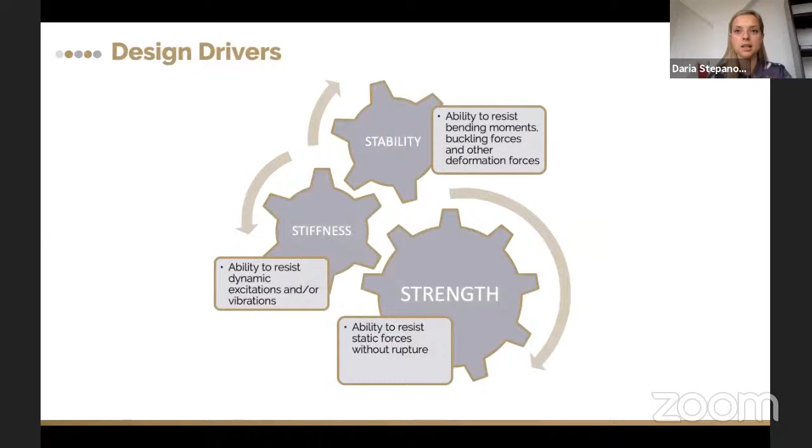The stiffness is defined as the ability to resist dynamic excitations and/or vibrations, and that's the major design driver for the launch of the satellite. And the strength, the last design driver, is defined as the ability to resist static forces without rupture. So these 3 design drivers define the materials used for structures, the structural approach, and the shape of the outer and inner parts of the satellite.

There are 3 basic big blocks in the structural hierarchy. The structure for CubeSats is divided first by the primary. This is the cube you can see below: the main rails and the brackets connecting these rails. This structure carries the major launch loads. As we remember from the CubeSat design specification, these rails are the only interface between the satellite and the deployer. So all the loads affecting the satellite from all sides influence the rails, and these rails and the connecting structure shall be as stiff as possible.

The second part of the structure is the secondary. This includes trusses, panels, booms, antennas, and components which are not really carrying the loads. That might also be some brackets inside the satellite which are stiffened enough. On the picture you can see some hinges for solar cells or antenna holders. And the last one is tertiary. These are component housings, brackets, fasteners, and other additional mechanical components.

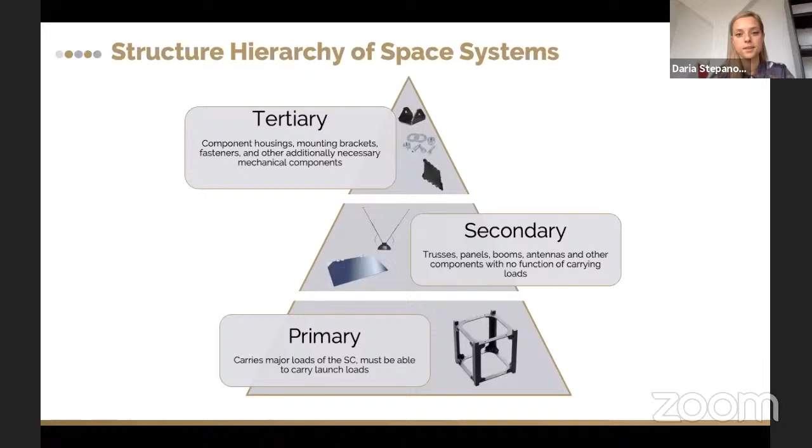Some of the components we're using do not need to be made of metal. We're also using plastic ones, but once we're talking about plastic, it's important to remember the outgassing parameters of the plastic components.

A few words about the primary structure. That's pretty much the core of the spacecraft, and it's the thing which is interfacing the deployers. It has to carry all the load which the satellite will experience during the launch, and it carries tensile and compressive stress. Here in the picture you can see some resonant modes of the CubeSat structure.

So basically during the launch, the satellite can be affected by this force and by this force, and the structure shall carry all these loads and not let the components get detached or get broken under this stress or bending moments.

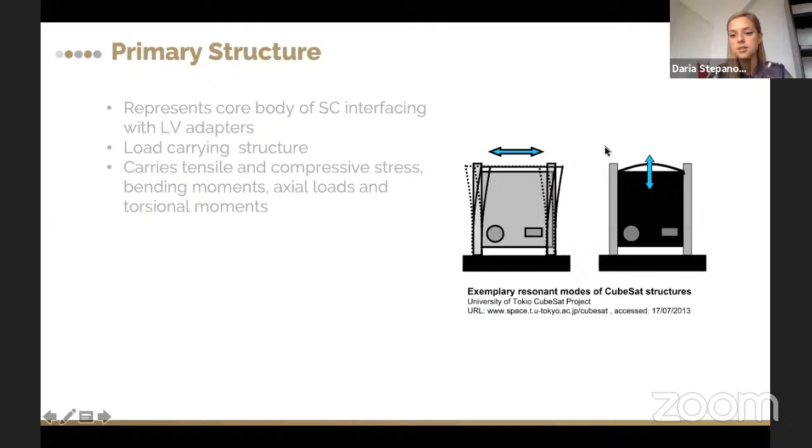There are a couple of major requirements for the primary structure. It shall provide a load path between the spacecraft and the launch vehicle. And as you can see, there are two bending forces, so the structure needs to accommodate these forces in an optimal way. It's a mechanical interface to the launch vehicle, as I've just briefly mentioned already.

It shall also provide access to components and assemblies during ground operations. For example, one big challenge CubeSat developers are facing: these panels are normally covered with solar panels, which are mostly the last component to be attached to the satellite, and it's pretty hard to connect the last connectors to this panel.

So the structure shall be designed in a way that all components can be accessed in an easy and fast way, and all the cables can also be attached in an easy, fast and optimal way. The structure carries the dead weight of the spacecraft. So besides the launch vehicle loads, it shall also carry the weight inside the satellite.

It shall secure positional stability for antennas and other instruments after launch and under changing temperature conditions. So temperature expansion shall also be taken into account while designing the structure. Antenna placement and instrument placement are particularly important because of the radiation patterns and the pointing of the instruments, which can influence the mission objectives afterwards.

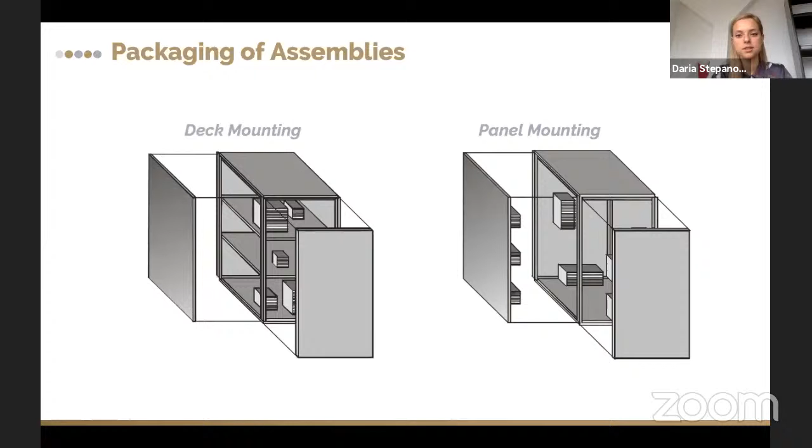In this case, internal components are placed on the sides of the satellite, and the basic structure is not carrying any components, and during the satellite assembly, all the panels are closed together with the components. Here you can see two examples of deck mounting and panel mounting.

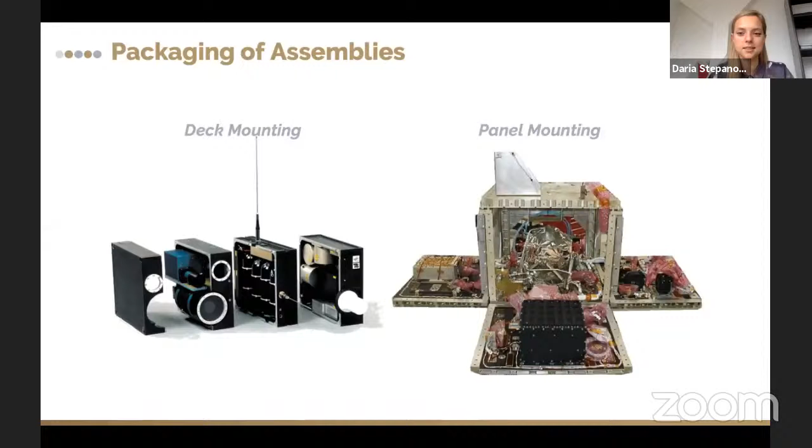Pretty much as I have said, in deck mounting the components are placed inside, and these two covers are the last pieces to get assembled. In panel mounting, a lot of components are placed outside, and we can see a little bit of a mess here with the harnessing and with isolation. But basically that's the concept and the idea.

Another two ways found a lot of applications in small satellites and CubeSats in particular. These are stack configuration and slot configuration. Stack configuration is something similar to PCs, using some standard connectors such as PC104 or some slot edge connectors.

Several PCBs are attached to the backplane PCB, and this is later assembled from the sides, stacking components on top. The big disadvantage of this approach is if, during the testing or during the assembly, one of the components gets broken, or there's an urgency to substitute a component, it's required to disassemble the whole stack and then start the assembly process from the beginning.

Slot configuration is something similar; it just differs from stack in that there can be several slots, and slots are a little bit easier to disassemble. You can see the connectors on this side, and slots are attached to these edge connectors.

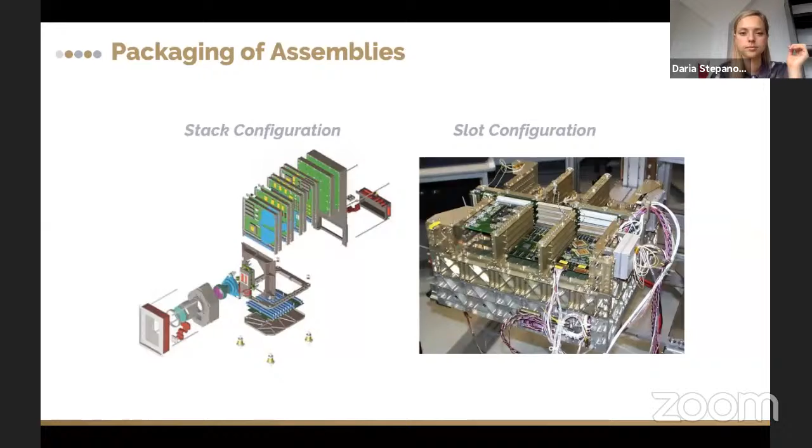So regarding CubeSats, here you can see the evaluation of each of the packaging options. Deck mounting is not really suitable for CubeSats because there's no particular deck in the CubeSat. Stack configuration is the one which is the most commonly used in the satellites, and once all of them are connected, either the ribbon cable backplane or standard connector, which is PC104 style, is used. However, integration and replacements, as I said, require a lot of additional effort, as does disintegration.

Panel mounting is possible in the small satellites. However, due to size limitations, it's pretty hard to handle. The panels have to be somehow connected, so that already makes it harder. That makes it harder to develop the harnessing inside the satellite, which brings complex wiring. The integration procedure becomes more difficult and most likely irreversible, because once the panels are mounted and everything is connected, it's quite hard to break some connections and some attachment points. That might make the procedure irreversible.

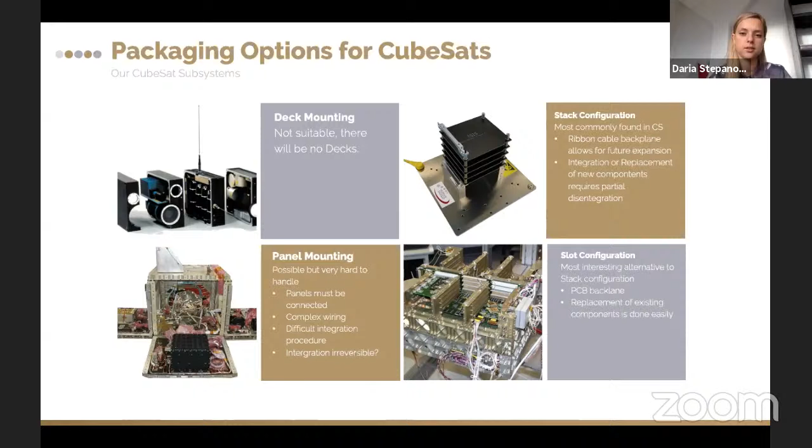Slot configuration is a really interesting alternative to stack configuration. It uses the backplane, and the replacement can be done in an easy and fast way. However, we didn't see many CubeSats with this packaging option. Mostly, I think, due to vibrations, the stack connector can get a little bit damaged. So the big question here is how to ensure a good connection between the board and the connector without advancing too much the mounting of that, and not making this a stack configuration.

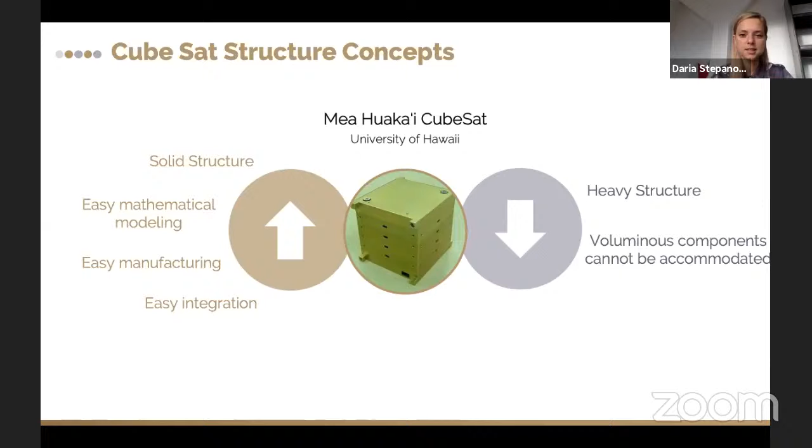We will review some of the examples for the structural concept, and the first one is the Mea Huaka'i CubeSat from the University of Hawaii. They use the solid structure. You can see there are not so many cutouts, it just looks like a big piece of metal. Some of the advantages are the easy mathematical modeling. Basically, this kind of structure most likely will carry all the necessary loads. It was pretty easy in manufacturing, and integration was easy. However, the satellite itself became quite heavy, and there is no possibility to accommodate components outside. So when designing solar panels, all the components of the solar panel shall be on the outside, like all the diodes and connectors, which is not always really easy to make.

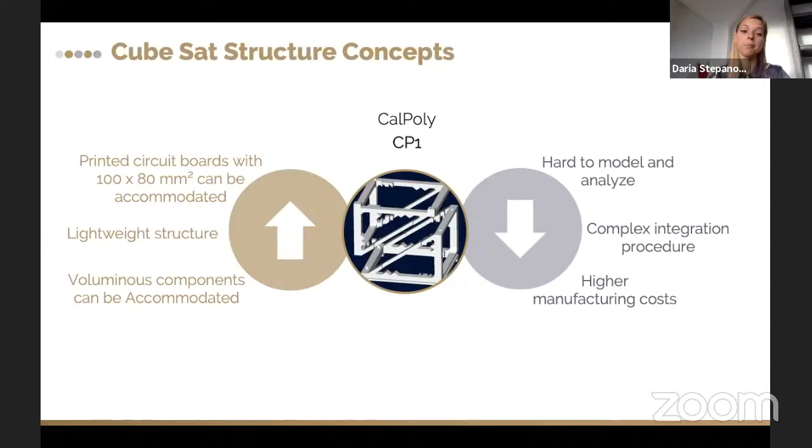The next one is the Cal Poly CP1 CubeSat architecture. It consists of two modules connected with these diagonal-shaped bodies. It's pretty lightweight. It can accommodate components on the outside and is pretty flexible with the inside accommodation. Printed circuit boards of the size from 100 by 80 millimeters square can be accommodated inside. However, this structure is pretty hard to model and to analyze in terms of stiffness and strength. The integration procedure might be pretty complex, and obviously the manufacturing cost of this shape is higher compared to the structure we've seen before.

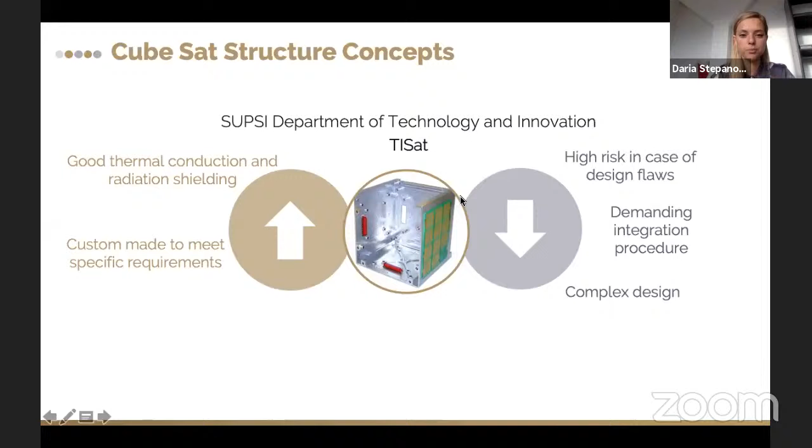In case there are any design flaws or there is another iteration of the payload and these access windows change in time, there's a high risk of the structure not being suitable anymore. So the integration procedure might be quite demanding, and the overall design might be quite complex. Yeah, this is how it looks. There are a couple of mounting points and access windows. However, as I said, all these parts might also be hard to manufacture.

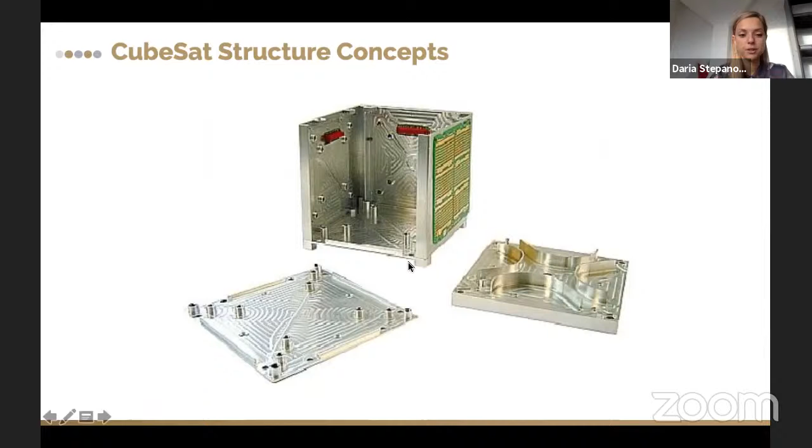Interesting concept. It was made by ISIS. This is the CubeSat structure I think most of the CubeSat companies got inspiration from. This one is really easy to buy. There is an online shop for CubeSat components, which is similar to a normal online shop. It's available in many different form factors, from 1U until 6U and already 12U.

It's quite a cost-effective solution. However, customers have to comply with the PC104 standard, so the mounting holes for the PCBs in the structure are already fixed, and in case the satellite designer wants to use other PCB sizes, there shall be another bracket or something which will attach the new design to the structure.

There are not so many options for deployables, so the structure tries to accommodate the maximum possible volume in the deployer, thus limiting the space on the outside of the satellite. And the side panel mounts are fixed, so there are also not many options for how to adjust the panel mounts.

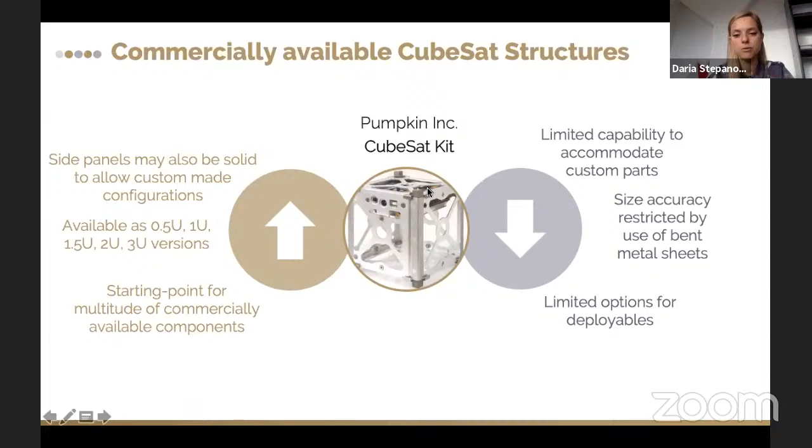Including these shapes in the structure, there is already a limited capability to accommodate custom parts. So in case there is a payload which has some specific aperture looking outside of the satellite, it shall comply with these cutouts. Size accuracy is restricted by the use of bent metal sheets. As these sides are made of sheet metal, there shall be other structural components, like these main brackets, top and bottom, which have to carry all the loads. And again, limited options for deployables.

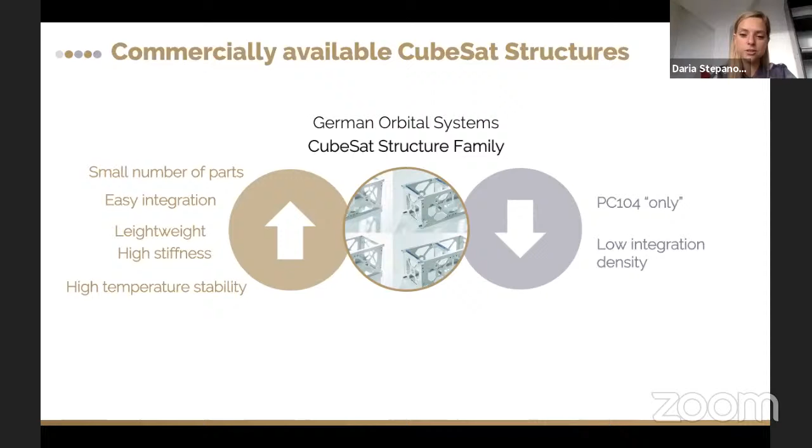As you can see, the CubeSat structure that we are providing has been inspired by this isogrid pattern. It consists of a small number of parts and is pretty easy in integration, lightweight and high stiffness. We're making it from aluminum alloy, which helps us to achieve high temperature stability. From the disadvantages point of view, it also mostly carries the PC104. There are some brackets available for other form factors of the internal components, and low integration density is also one of the disadvantages of our structure.

A quick summary on the structures. It has to be made out of aluminum for good thermal properties and good interface matching between the satellite and launch adapter. CubeSat configuration is actually determined by the primary structure. The primary structure sides, apertures, openings are on one side defined by the payloads and by the systems which are in the satellite. However, they also dictate the composition of the satellite and their placement.

Many CubeSat projects develop structures on their own. That's true because the structure is not the most complicated component of the satellite, so many manufacturers are pretty free to design it by themselves. Interestingly, approximately 20% of the total mass of the satellite is due to the structural elements. So they tend to be over-dimensioned due to limitations in manufacturing small wireframe structures.

As for composite materials, there are some structures made of composites, and I think there were several experiments launching composite structures. However, it's not as widely utilized as I think it might be in a couple of years. For CubeSat structures, launch loads like sinusoidal, random vibration, acoustic, and shocks are pretty much harmless. That's due to the design approach and material selection.

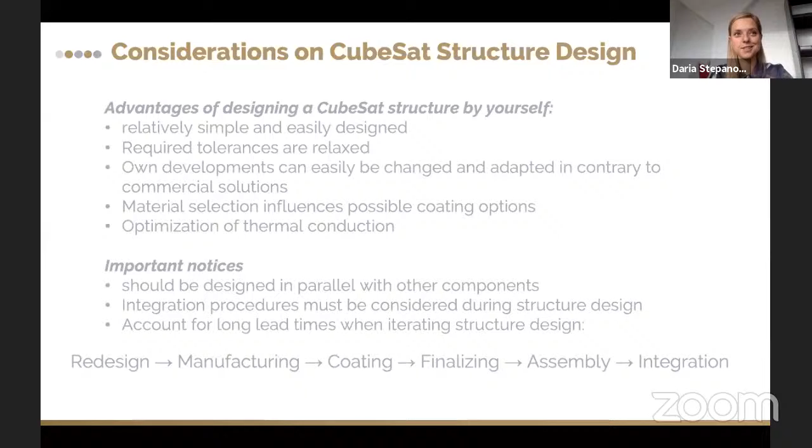All right, basically, there are these steps in structural design: design or redesign, manufacturing, coating, finalizing, assembly, and integration. This is the flow of the structural life in the CubeSat. And with this, we're going to the second topic, which are mechanisms.

Do you have any questions so far regarding the CubeSat structures? Or everything is fine? Okay, thank you. Are there any questions? Okay, if there are no questions, I'll continue with mechanisms.

There are a couple of types of mechanisms in the CubeSats, and the first one all the CubeSats shall have, based on the CubeSat design specification, are deployment switches. These are really small sub-miniature micro switches, which are attached to some spring mechanism. Basically you can see it over here. This is the structural side. This is the rail, in the cross section of the rail. This is the micro miniature switch, spring, and it can be a screw, it can be just some cylinder made of metal.

So once the satellite is in the deployer, this switch is pressed and the satellite battery is detached from the rest of the components. When the satellite is deployed on orbit, this switch gets unpressed, and the battery then is connected to the main system.

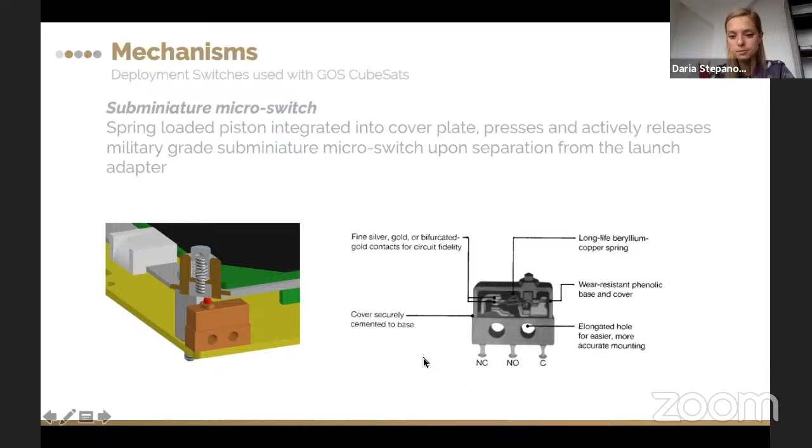So this component every CubeSat shall have and shall accommodate on the rail side, it shall be somewhere on the rail, because there shall be a connection between this mechanism and the deployer side. And here you can see the internal parts of the switches.

The next one is the solar panel hinges or solar panel deployment mechanisms. You can see several times folded solar panels. Basically, this is a pretty easy mechanism. Hinges are also supported by springs, and the panel is folded several times. And then a mechanism really similar to the antenna release mechanism, which I'm going to talk about in a few seconds, is used. Once on orbit, this mechanism is activated and the solar panel, due to the spring forces, is deployed.

Antenna release mechanisms for CubeSats, there are several types. Most often it's an electrically powered heating wire made of nichrome, and the antenna is attached to some plastic or any type of material part with a nylon string. Once on orbit, the wire is heated and the nylon filament is melted. On this picture, you can see the example of the BEESAT antenna release mechanism.

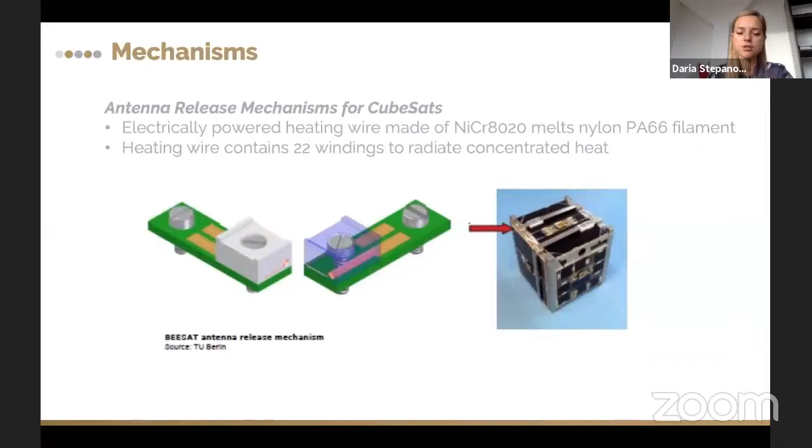Instead of the nichrome heating wire, it's also possible to use a resistor or any other component which can be warmed up pretty quickly and does not outgas so much. So that was a pretty easy, pretty fast, really easy to reinstall mechanism approach.

There are more interesting antenna mechanisms. For example, this one is accommodating up to 4 antennas of different lengths. All these antennas are stowed inside this really small compartment. But inside of this compartment, absolutely the same approach is utilized. So there's also the melting wire and the heater, which are activated at some point, and then due to the spring forces in this part, the legs of the antenna release mechanism are opened.

This mechanism is a little bit more difficult to handle and to reinstall. However, it's quite small in shape and can accommodate up to 4 antennas. All right, that was briefly about the mechanisms. And from here, we will continue with the power control and distribution system.

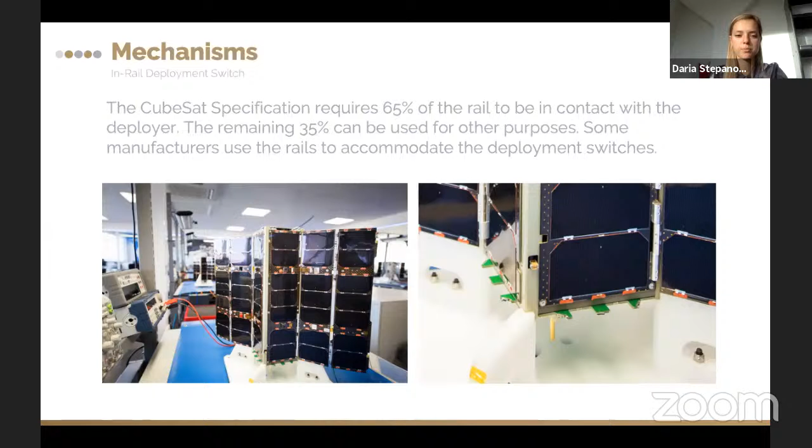Yeah, however, Azur Space is selling just the solar cell components, but the whole solar panel has a little bit more complicated design. For example, the protection from solar cell failure, the maximum power point tracking, the thermal control, and so on. So at our company, for example, we're taking the cells and we are providing the design of the solar panels of different shapes and so on. And pretty much every CubeSat company is doing that.

All right. Next, the power control and distribution system. There are four main tasks the system is doing. The first one is the conversion, storage, and distribution of electrical energy. And here we remember such components as solar panels, batteries, and control modules for distribution and processing. Acquisition of system health parameters: as soon as the power is distributed between systems, it's also required to get feedback about whether they consume enough current, or whether there is some anomaly which makes them consume more power than was specified. Operation of switches and systems monitoring are the third and the fourth one.

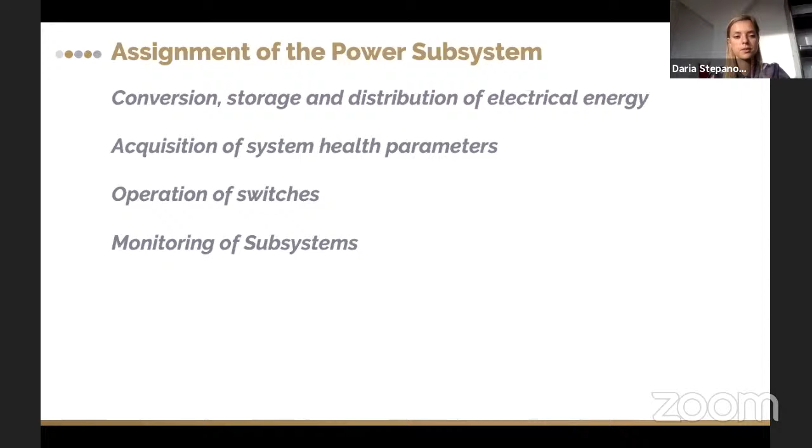So general requirements for the power control system are listed here. EPS shall provide a continuous supply of electrical power. It shall control and distribute electrical power between payloads and the main bus. It shall support requirements of peak and average power. For example, once the communication modules go into transmit state, or some system turning on draws a lot of current at that moment, the power system shall take this into account and either smoothen it or prevent the system from turning on.

It shall provide telecommand capability for systems control. Basically, that means that we shall be able to send a telecommand to turn on or to turn off the system. It shall provide telemetry capability for system status. That includes power consumption. Is the voltage level correct? Is there any fault in the system switch? Activation and deactivation of assemblies, protection of the spacecraft against failures of the power system. And here we shall also consider redundancy in some of the main components, avoidance of single point errors and redundancy strategies. Basically, that's what I just said.

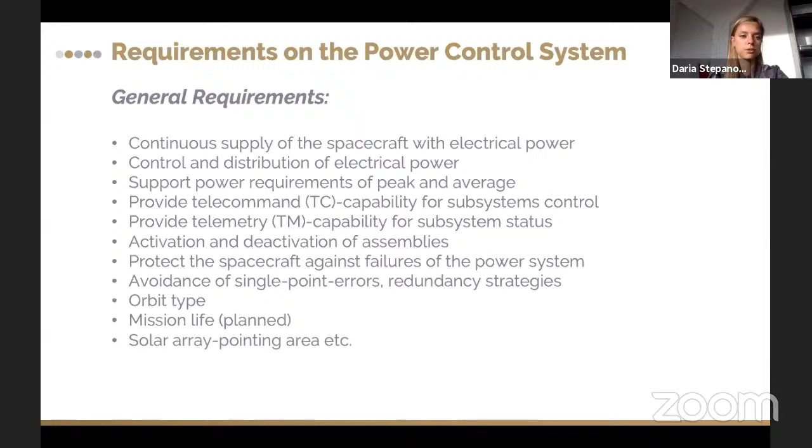The EPS shall also consider orbit type, in terms of height and inclination, which will influence the solar cycles. Mission lifetime planned, this mostly influences the battery charging and discharging cycles. Solar array pointing area, and so on. So these were the system requirements. If we're talking about mission specific requirements, there shall be the type of the power supply bus. There can be several types.

Bus voltages, these are normally 3.3 volts, 5 volts, unregulated, and 12 and going higher. Energy and power demand in different satellite operation modes. We're going to see that a little bit closer in the next slide, but it depends on the number of active components and their duty cycles. Type and amount of system health statuses, measurements, values, and this includes currents and voltages. It can also include temperatures. Yeah, these are most commonly used.

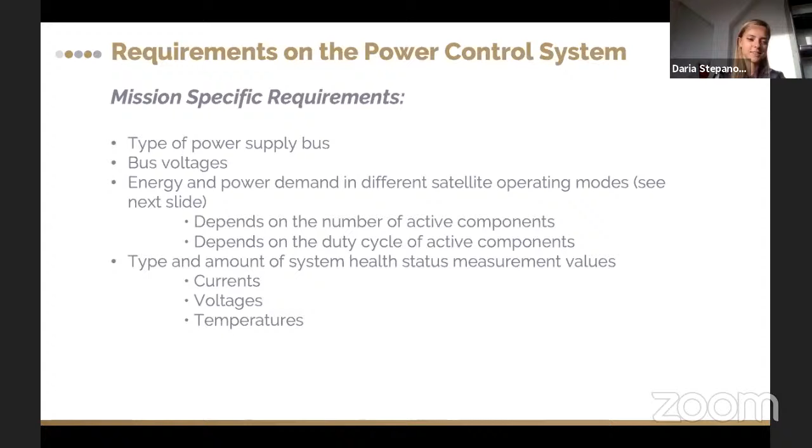And we'll not go into detail of every one of these requirements. Based on this example, the power control distribution unit from the satellite, we'll see how the design process is and how we go through all these requirements to get the proper system working in the end.

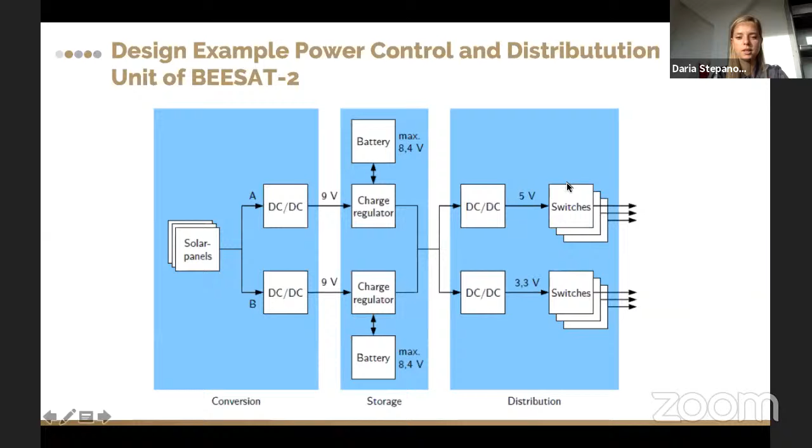Charge regulators are autonomous switching units, which are based on the voltage and current level from the solar panels and the state of charge of the battery. Most of the time the voltage level of the battery decides whether it's time to charge the battery or the battery is completely charged. Then from the charge regulator, the power line goes to 2 converters, in our case 5 volts and 3.3 volts, and each of these power buses is then supplied to the switches.

As I mentioned, here are the solar panels and solar cells. We are purchasing them from Azur Space company. The triple junction gallium arsenide solar cells with 30% efficiency. We're using in this satellite a configuration of 5 panels with 2 cells on each, and one panel was accommodating 8 cells, but that was more of an experimental thing. In this kind of small CubeSat, the available power was around 2 watts, and that was pretty much enough for all the experiments we wanted to conduct.

Here you can also see how the solar cell itself looks. That's the datasheet screenshot, which shows the parameters of the solar cell. Average open circuit voltage is 2.5 at the beginning of life, and average short circuit current is 16.9 milliamps per centimeter square. So if we calculate the area of the cell, we'll get the average short circuit current.

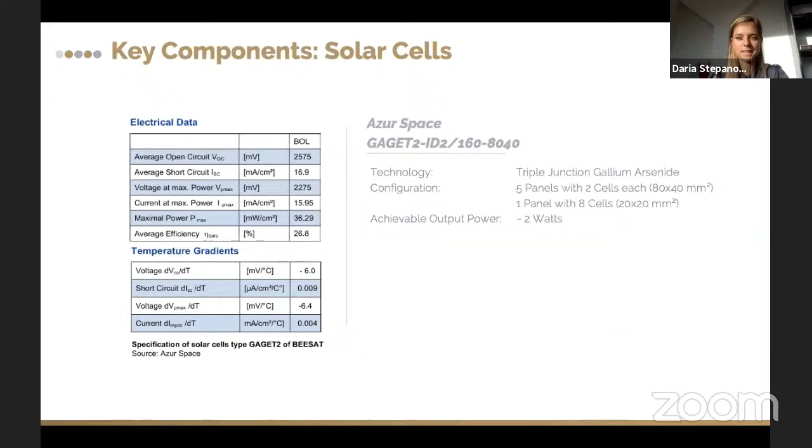There are also some temperature gradient characteristics, which are important to include in the power budget analysis, because the curve which connects voltage and current of the solar panel is influenced by the temperature. And as we see, the solar cells are black, so they might get pretty hot in the sun. This will also influence the power on the output of the solar cell.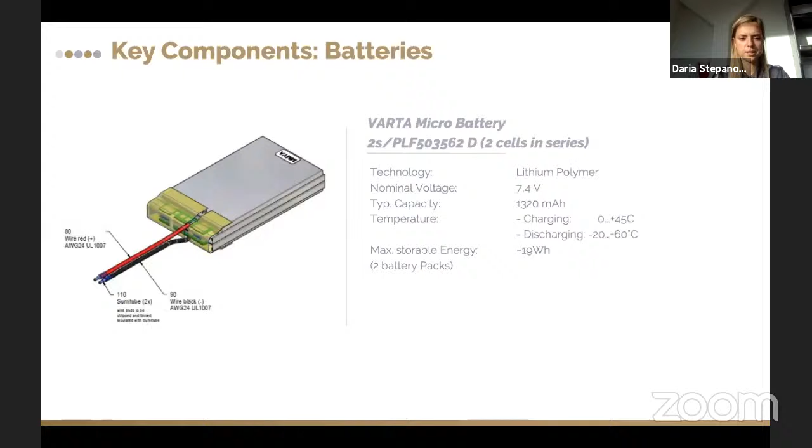The critical thing here is the battery can only be charged when the temperature of the battery is more than 0 degrees. In order to prevent battery failure from charging in the cold, we're also adding heaters and temperature monitoring in the battery pack. Maximum stored energy of the 2 battery packs used in the satellite, BSat, was 19 watt hours. Basically, 2 battery packs were used.

The power control unit is the unit responsible for processing and distribution of the power. It is based on one microcontroller, which is controlling all the switches. It gets the information about switch states and power consumption of all the modules through analog to digital converters. In that case, it was 16 channels on each converter. There is a circuit with an integrated watchdog, which helps against latch-ups during on-orbit operation.

The basic principle of this system is the following. The main switch is controlling the power coming to the microcontroller, and the watchdog has a specific period of time where it shall receive the signal from the microcontroller. If it does not, it resets the main switch enable signal, and the main switch does not feed power to the microcontroller anymore. In case of microcontroller failure to send the signal to the watchdog, obviously something has happened and the power of the microcontroller is reset.

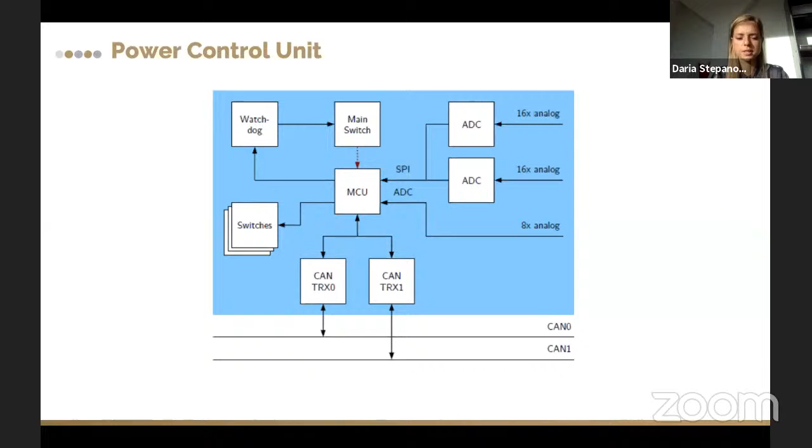In this way, it's possible to save the microcontroller in case some particle event is happening. The microcontroller is also connected to two CAN buses. There is a redundant CAN bus introduced in the satellite, and for that there are two transceivers installed. And here you can see the first prototype of this control module.

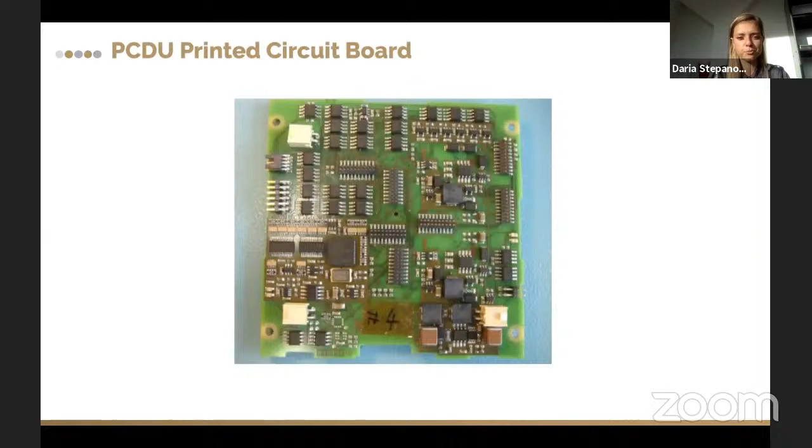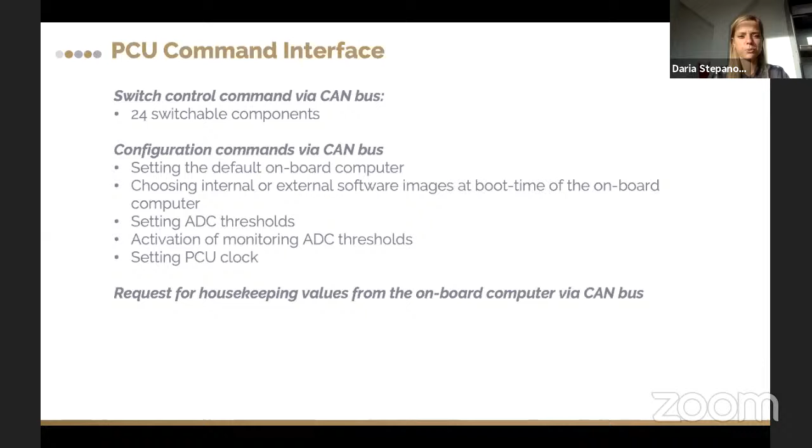It had 24 switchable components for turning on and off external systems. Via CAN bus, it was possible to set the default onboard computer parameters, choose internal or external software images, set ADC thresholds, activate monitoring of these thresholds, and set the PCU clock. So the request for these values was done from the onboard computer via this redundant CAN bus.

And this was already the final design of the system. I think it looks much prettier. In several design iterations, we achieved that this system can be suitable for 1U, 2U, and 3U CubeSat designs. So here, the EPS can control up to 16 power buses and features a power distribution unit with these 16 buses. It is really failure tolerant, and it monitors every channel.

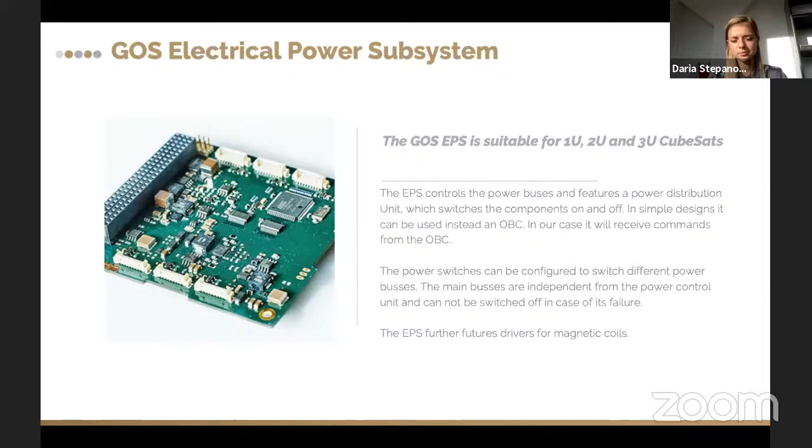You can set up the channel parameters via the software. Power switches can be configured to different power buses and different voltage levels. Main bus is independent from the power control unit and cannot be switched off in case of failure. So that means if the main microcontroller of the electrical power system is failing, then the power channels which are selected will still be operating, and it will still be possible to get signals from the satellite.

What type of battery is recommended to use in CubeSats? Lithium polymer. Okay. So is it also some kind of specially designed? These ones are not specially designed, they're commercial off the shelf. So we do not put much effort or resources into purchasing space grade batteries. However, we provide comfortable conditions for the batteries in terms of temperature, battery monitoring, and charging. Some batteries have a specific charging profile, and we try to put more effort into designing a proper system to work with these batteries.

Okay. Is it explosion free? You never had any problems with explosions? Yes. Okay. Thank you.

Yes? Excuse me. My name is Bakhtiar Palwanov. I am a physicist researching semiconductor structures we use in preparing solar cells. I have one question.